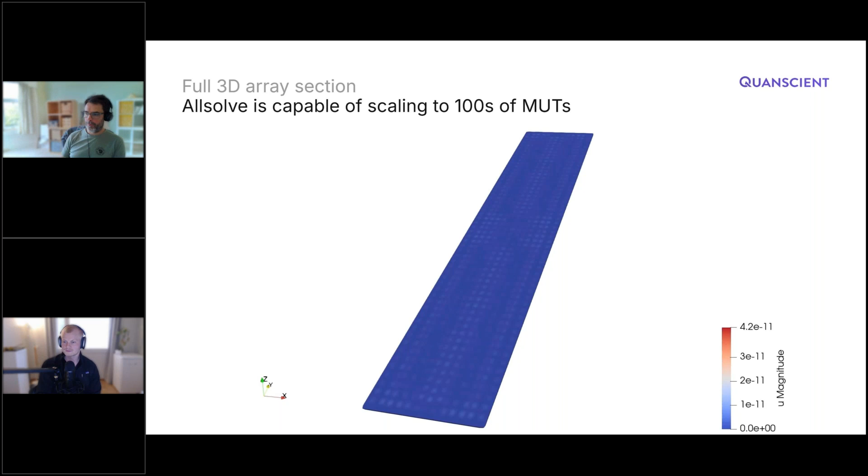Oh, someone's confident. Someone's all over this. Oh yeah, there is a whole array answer right there. One person said a few. All right, just a few more seconds. See if someone else wants to answer before we put out the results and move forward. All right, just a couple of answers. One person a few, one person got this with the whole array. All right, thanks for the answers, and back to you, Andy.

Thanks, Yuka. Okay, so let's dive into some PMUT case studies. So the array that I'm going to use as an example here was taken from a paper from Professor Horsley's group when he was at BSAC in Berkeley, and it was an early PMUT fingerprint sensor which you can see here it's got a silicon elastic membrane layer, an aluminum nitride piezo layer, and it's stacked on a silicon dioxide wafer which then bonds onto the CMOS wafer through some electrical interconnects.

The paper mostly discusses this being used for fingerprint sensing, and most of the work in the paper looks into a PDMS load because they're trying to replicate basically a tissue mimic. But what we did here was look at it as if it was a medical type array being used for medical imaging. So we looked at it operating into a water load, which is very close to the design load, so we can get some sensible results out.

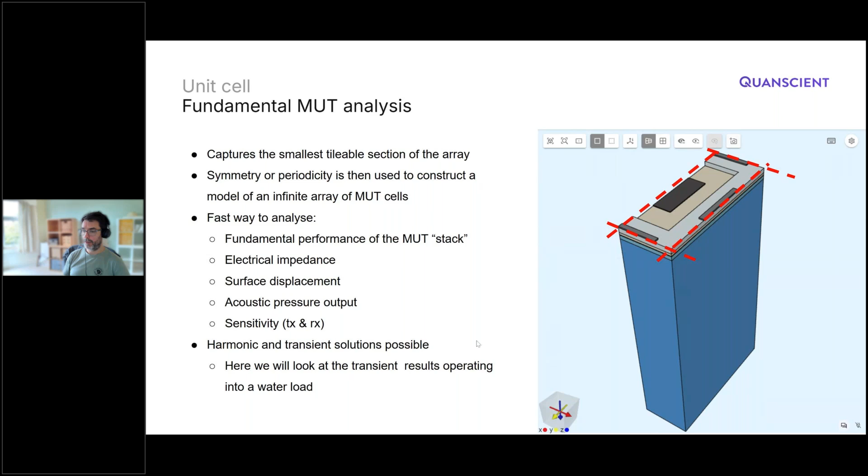Oh, sorry, I've commented that I think the slides I've got here are just for the transient results. I'll not dive into meshing in a lot of detail, but safe to say that there are a lot of different meshing options in Allsolve. So it is a true multiphysics general FEM package.

So we're not saying, hey, we're able to simulate these large arrays because we've taken a stripped down, say, finite difference approach, or even an explicit FEM solve with a structured grid, which are potential ways of accelerating a narrow range of ultrasonic simulations, but they don't offer the broad flexibility that a general approach like ours does.

So when we do transient simulations, we're implicit transient. We can support arbitrary meshes like the ones that you see on the screen. And that gives us a lot of flexibility to really include the detail and the geometry, and also the flexibility to include pretty arbitrary device physics where necessary.

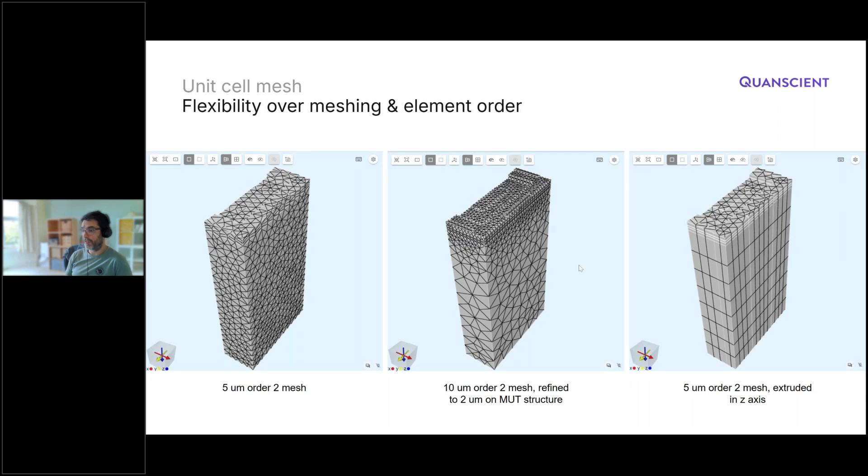And some more time domain outputs that we could look at here. This is the displacement. I believe in this case it was at the center of the cell, but sometimes we like plotting something like the average surface displacement. This one's quite useful because it could be compared directly to, for example, a laser vibrometry measurement. And this is pressure in the load, just at the base of the load here.

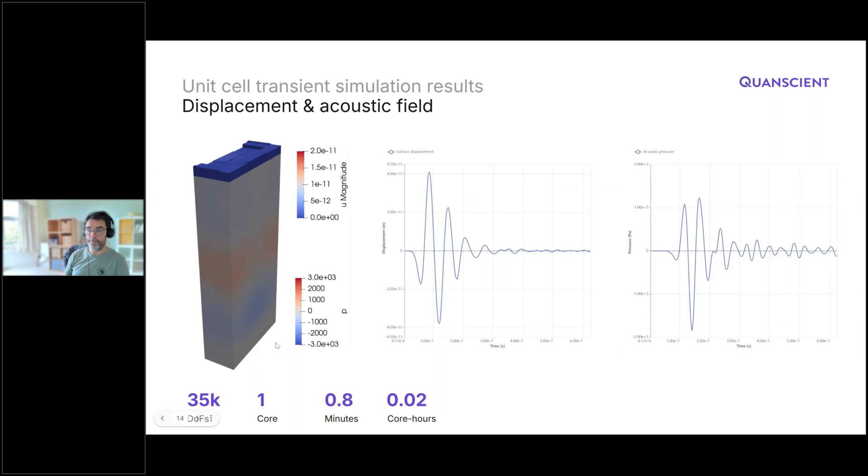You'll see from the metrics below that this is a really compact model. So it runs in less than 60 seconds, it consumes very few core hours. So it's a very efficient way of simulating the fundamental performance of this stack.

So okay, let's assume that we've run maybe thousands of those simulations. We've got a better idea for how our design performs, and we want to start to look at array level performance. Well, in our linear array example here, something that we might want to do is simulate a single element of the array and potentially look at the output of that in the far field, maybe recreate some things that we would measure in a scanning tank or a wet bench, as it's sometimes called.

And in this case, we're going to simulate the elevational beam pattern. So we've got a full element here. We're going to apply symmetry to these two long dashed lines and also this shorter dashed one. So we're simulating driving a large array of these elements and trying to understand what the elevational beam pattern would look like. And in this case, we're going to do this CW, so we're going to use a harmonic analysis to do that.

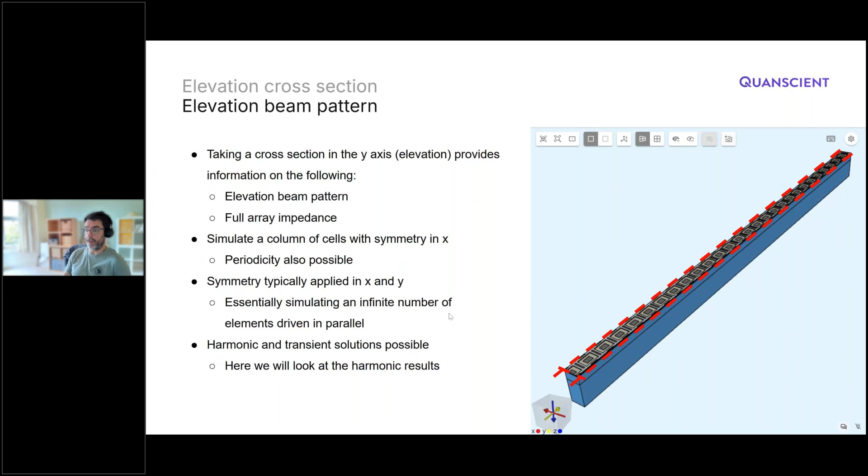And this is what it looks like. Here's the displacement and pressure fields. Again, we're looking at the back of the array here, so we can see the displacement in all of the MUT elements. This one's at the center of the array. We've applied symmetry in that direction. And you can see that at the end of the array, now they're not particularly significant here because it's a long element, but we can see that there's a slightly lower displacement here. So we're seeing those length effects on the element, the effects of the end of the element and the start of the substrate and how that loads the last cell and influences the surface displacement.

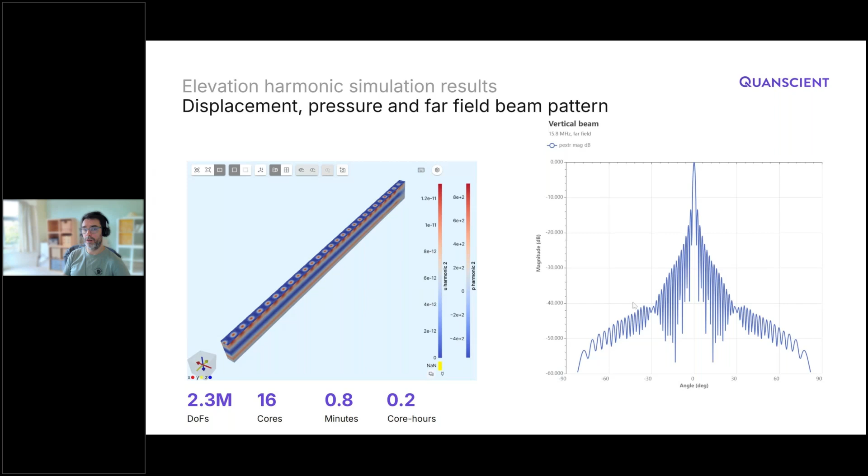And when we plot, I've called it a vertical beam pattern here, but elevational beam pattern might be a more proper term, we can see that we've got, as you'd expect from a long array like this, a very narrow beam. Again, this is a relatively fast simulation. We're running this in under 60 seconds, even though it's somewhat more degrees of freedom, but it's a harmonic solve as opposed to the previous solves where we're transient with many time steps.

Final cross-sectional model here is taking an azimuthal slice, and what this is really useful for is simulating crosstalk, which I think a lot of people in the field are interested in. But as I say, there's not a lot of simulation tools that can really do this effectively.

So I really like cross-sectional models in the azimuthal direction because it gives you really quite a lightweight model to analyze the azimuthal beam pattern and also crosstalk effects and come up with design features that might suppress crosstalk and give us a broader and potentially smoother azimuthal beam pattern.

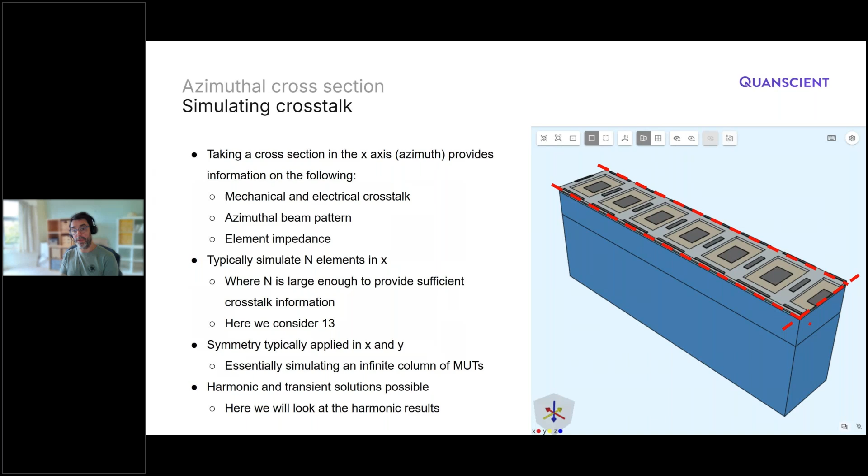So again, the dashed lines are all lines of symmetry. So essentially what we're doing here is we're driving a central line of elements, and we're leaving these 1, 2, 3, 4, 5, 6 adjacent elements passive. They're not being driven. And we're going to be able to observe any crosstalk that propagates across the array and would potentially interfere in a linear array with our ability to steer the beam throughout some sort of body.

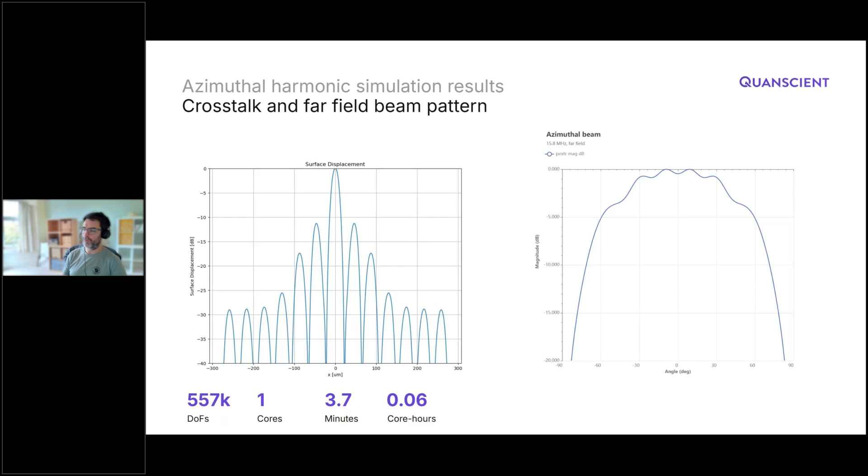Engineers who are designing beamforming algorithms might have placed a spec on the level of ripple that can be tolerated in here for a given image quality. So that might be something that's in our spec that we need to be able to work towards. One thing I will say is that harmonic simulations will always exaggerate these interference patterns. We would expect that running a transient simulation would result in somewhat smoother behavior here.

And then finally, after having run these two cross-sectional models, gained some confidence, maybe refined their design somewhat, we can move on to really a combination of those two previous simulations. So we've got a full line of MUT cells along the dashed line, which are going to be driven here. And then again, we have 6 passive elements on each side, which aren't going to be driven, and we can observe crosstalk on.

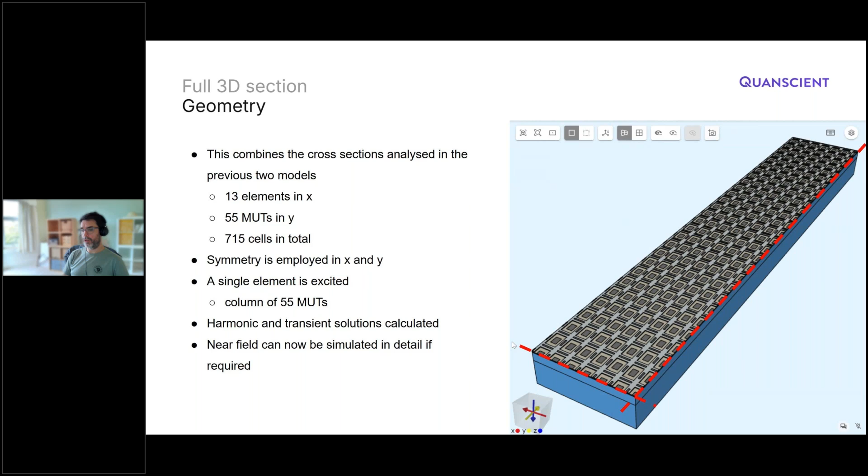And here's some transient results from that simulation. So again, drive voltage and current. We could easily plot charge here as well. We've run this time on 32 cores on the cloud, and it still runs in 15 minutes. Really quite a compact model for an array of this sort of scale.

Here we've got a little bit like what we saw in the unit cell model, the surface displacement, and then acoustic pressure out in the load. There's obviously various ways we could plot that. We could plot that at particular points, or we could plot an average, or indeed we could plot that at a distant extrapolated point.

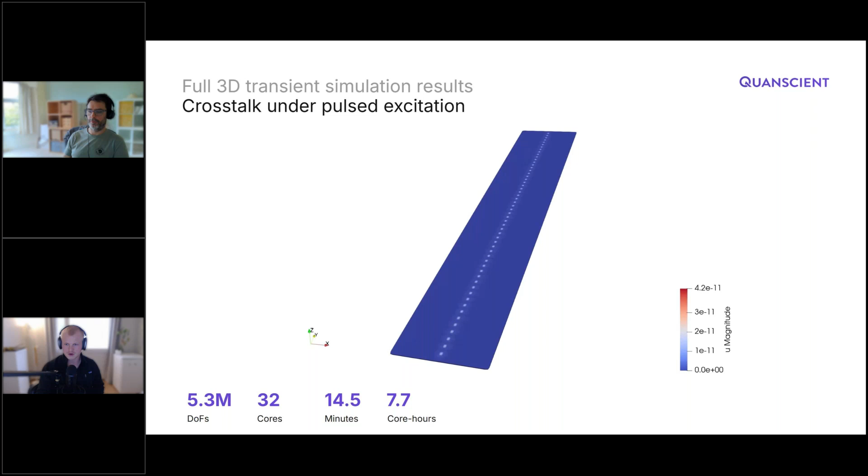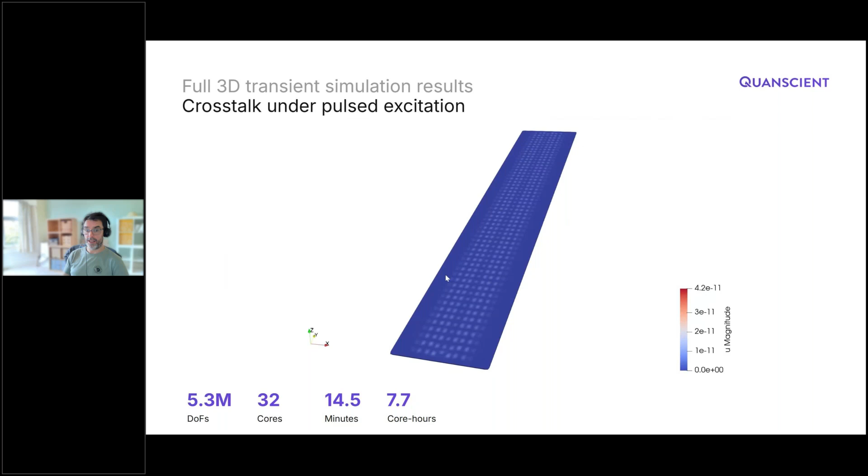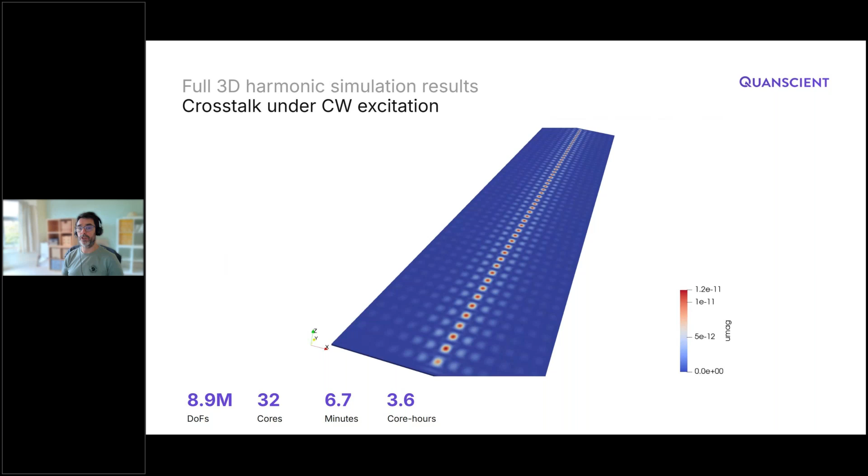So I already teased this earlier on in the slides. This was indeed, when you saw this earlier, this was the result from this full 3D array section. And that's as a transient simulation here. And then, of course, we could also do that as a harmonic simulation in CW. So there's lots of options. You can choose the option that best recreates your lab measurement techniques. That's what we're always looking for, to be able to recreate and then ultimately to predict experimental results, predict performance in real world situations.

And the final set of outputs from that 3D array section are both the azimuthal and the elevational or vertical beam patterns. And these look very, very similar to what we were able to achieve with cross-sectional models. So the message that I would emphasize here is, when you can run cross-sectional models, it's a really good idea. It's a really direct and lightweight route to get you a lot of valuable information.

The thing to bear in mind is that there are sometimes secondary effects that a cross section can't capture, and there are also some geometric designs and structures that they can't fully capture. So it's important to choose the right tool for the job. But I would always aim to run a lot of cross-sectional models for every very large 3D model. That usually is the best way of arriving at a good design.

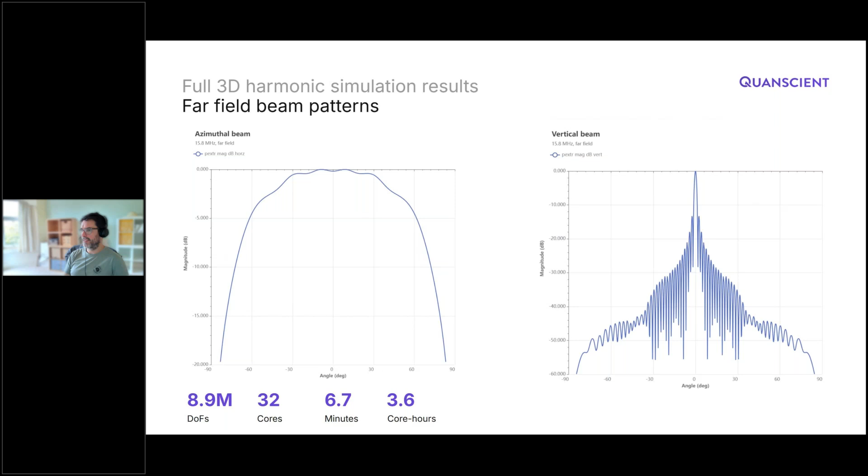So that caps off everything that I wanted to talk about for PMUT. I'm going to show a very quick set of slides, some of the work that we were doing towards the end of last year on CMUT.

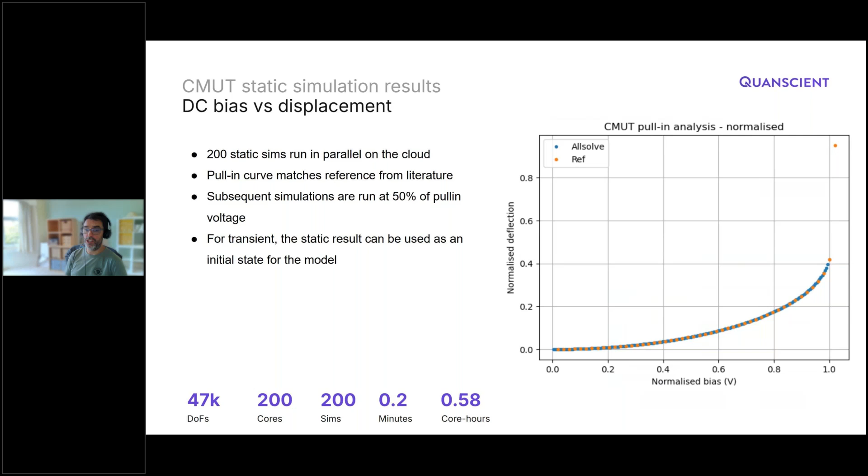And what we find is that in a lot of the analysis we do, we employ sweeps quite readily to explore either different boundary conditions and settings or different geometries, material properties, these types of things. The idea is to cut down the engineering time that's involved in these types of analyses.

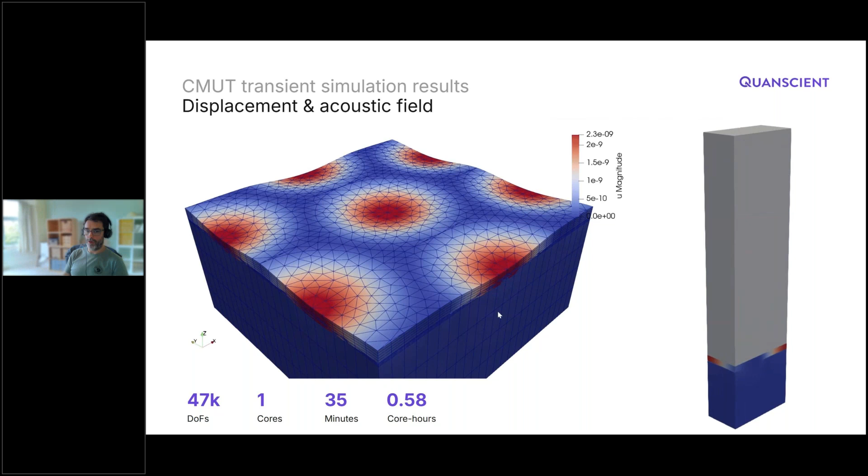But it's representing an infinite array of CMUTs, and that's an output pulse operated into a water load. And again, we can create similar plots to what was done in PMUT, noting that the run times are somewhat longer here.

CMUT with its nonlinearity tends to be a relatively long solve, but our solvers can parallelize that very well using domain decomposition. So what you find is it's possible still to go to many hundreds of elements by dedicating 100 or more cores to the simulation.

It's not an easy one to accelerate such that it will run in 10 seconds because there are a lot of nonlinear steps to do. But our parallelization allows large arrays to be done like that without the runtimes becoming commensurately large.

There's some quite unique things that we can do when it comes to CMUT. We have a multi-harmonic solver, which can be very effective for nonlinear devices. We use it a lot for MEMS resonators. We use it a lot for MEMS microphones and speakers.

And what it means is that you can simulate not just the DC bias and the drive frequency, but potentially the nonlinear content that's generated by the nonlinear behavior of the device. So you would see harmonics if you wanted to plot those.

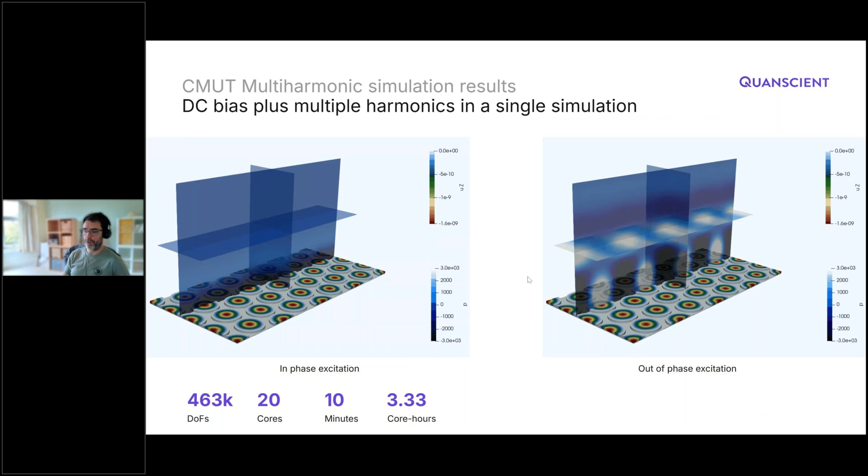So there's a lot more that we can show in CMUTs. There's a particularly interesting case study that we hope to cover in future webinars. But for today, that is the technical content that I wanted to showcase to you.